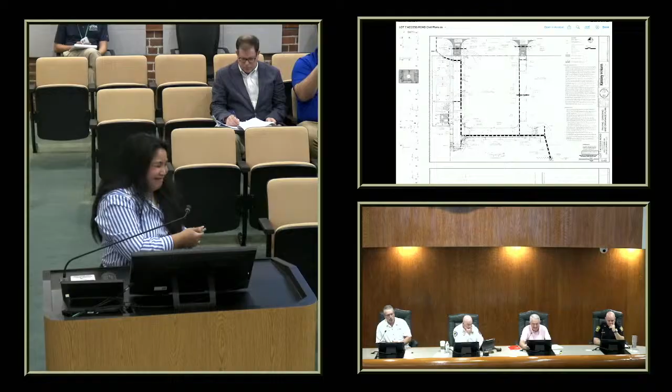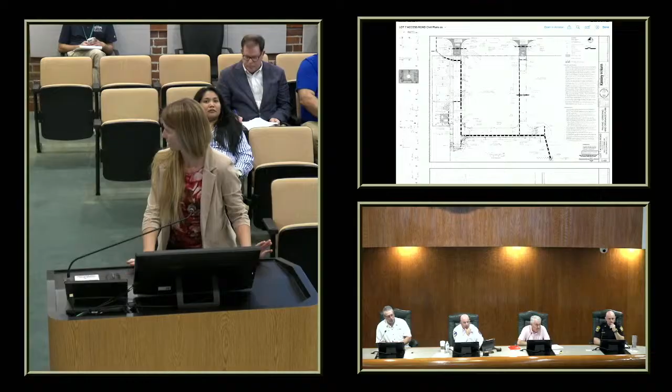All right, the applicant's in attendance, would like to discuss the comments you've received. Yeah, we had questions, but to not hold up the DRC, Dale and I are just going to talk about it after. Thank you. Right, they will meet offline.

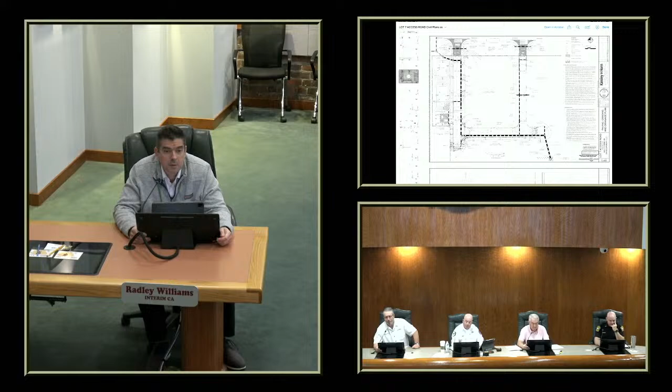Any other questions or comments on this one? All right, planning has nothing else. Police, no comment. Public Works, no comments. Fire, no comments, thank you. Building, I don't have anything.

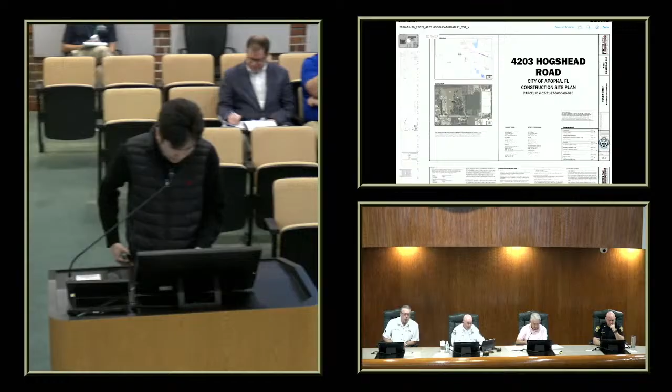Next item on the agenda is 4203 Hogshead Construction Site Plan second submittal. It says Gene's project manager, but I believe it's June's project. Good morning, this is the second submittal CSP for industrial development at 4203 Hogshead Road. Future land use is industrial, zoning is light industrial, and the total building area is about 4,000 square feet of office and 30,000 square feet of open storage structure, with outdoor storage of about 2 acres.

The applicant is available for any questions. All right, the applicant's in attendance. Do you have any items you'd like to discuss with the DRC? There were only a handful of comments, I think Dale had 3 or 4 of them, so I'll just have an offline discussion with Dale. Dale's the man today. All right, any further questions on this one?

All right, planning has nothing else. Police, I've got no comment. Public Works, no comments. Fire, no comments. Building, I don't have anything.

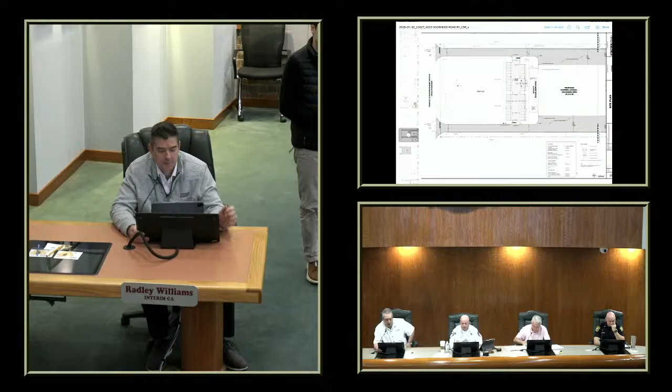Thank you. Next item, Apopka Phase 4 Soccer Fields Northwest Complex Construction Site Plan first submittal. I am the project manager on this one. This is a plan for soccer fields at the Northwest Recreation Complex off Jason Dwelley Parkway. It's a city project, representative for the city is here to discuss the project.

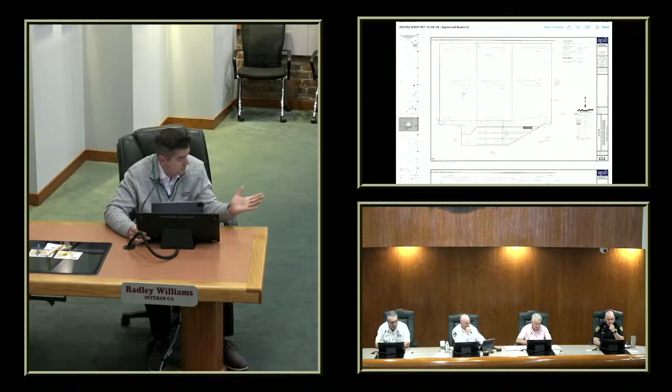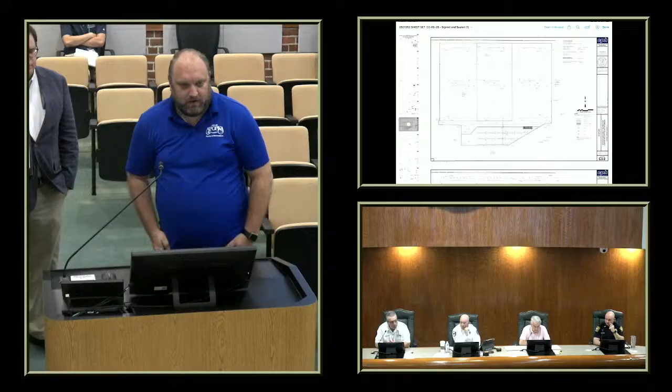If you guys wouldn't mind coming up. Chris Richter here with the Parks Department, also have John Stockham here with CPH who did the design. If there's any questions, I know we received comments back from Dale and Bobby, so we will address those and provide clarification as needed. But if there's any additional questions, feel free to let us know.

Does any member have any questions for the applicant on this one? All right, and as they mentioned, they received comments from Planning and Public Works, and we'll look for that and have a resubmittal on that. Planning has nothing additional other than the comments that were generated.

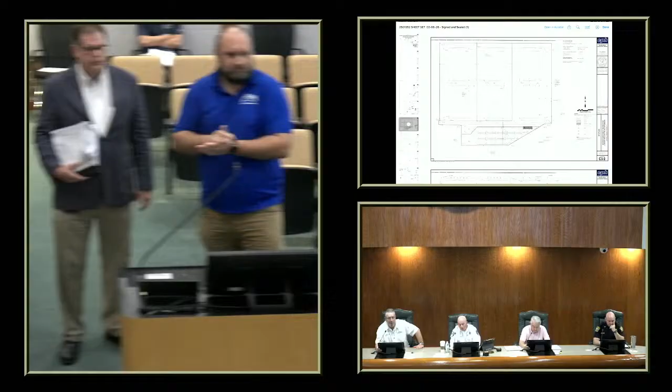Police, I don't have any comments. Public Works, no additional comments. Fire, no comments, thank you. And Building, nothing. All right, thank you, gentlemen. Thank you.

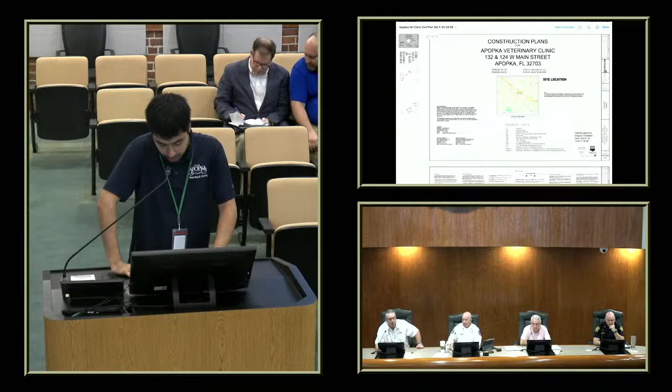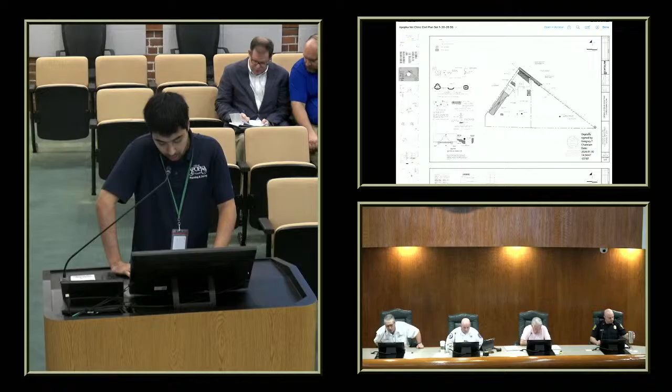Next item, Apopka Veterinary Clinic Construction Site Plan first submittal. Amir Hamza, Project Manager. Good morning everyone, so this is an expansion of the existing veterinary clinic. It's a new 3,662 square foot building. The zoning for the property is mixed use downtown, and future land use is commercial. Staff and applicant are available for comments and questions.

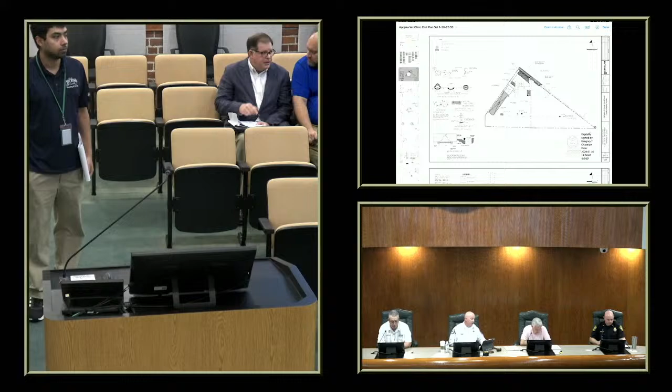All right, I believe the applicant's in attendance. Do you have any questions or comments for the DRC? Yeah, my name is Greg Chatelaine, I'm with Chatelaine Engineering. My name is Bennett Sebastian, I'm with Envision Development. We're applicant on behalf of the owner.

And I think most of my questions are in regards to the planner or the engineer for technical, I don't know if those guys are here. Yeah, the planner is right here, and then the Public Works is right there. Okay, so should we ask our questions line by line right now, or do we save that for later?

However you want to do it, or if you want to schedule a meeting offline, we can do that also. What are your thoughts, Ben? What do you want to handle?

Well, I think there's quite a few comments we have to address, so we don't want to take up everyone's time here going through that. Is there any overarching feedback that we need to be aware of at this point? Just the comments. Okay, yeah.

So then we probably need to schedule an offline meeting. We've had a couple of meetings already with planning and zoning, so we can schedule another one to review these comments. And we've had several phone calls working through this.

Okay, and so as far as planning, who would be the main contact? I guess we have the contacts, we'll just stick with the main channels here. Planning at apopka.net to set that meeting up, or you can set it up directly with me at dsmith@apopka.net.

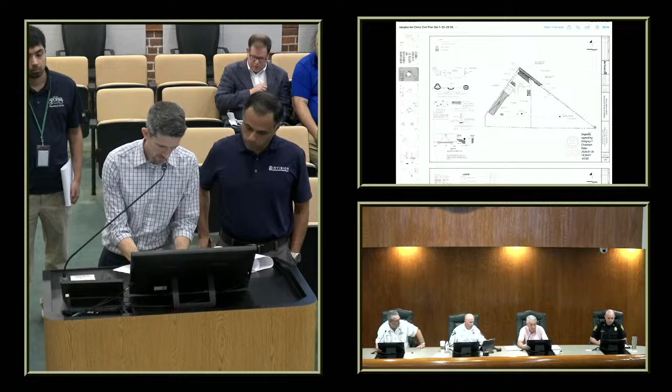Gotcha, so you're the main point of contact we need to talk to. I thought you were in engineering. Well, I'm public works and engineering. Engineering and public works. The planner is behind you.

Got you, and so, Amir Hamza. Okay, nice to meet you, Amir. Nice to meet you. Amir Hamza. Okay, do we have your email address? Yeah, it's AHAMZA at apopka.net. Okay, because I think you put the comments together.

Yes, I mean, we can discuss the comments here if you want, unless you'd prefer not to in front of the group. Yeah, I mean, that's what every other development does, so let's just do it if you prefer. I mean, up to you guys. We're here, might as well get it done.

All right, so these comments are going to be addressed to you? Yes, planning and zoning comments come to me, and public services comments go to Dale. Okay, I don't know if you want me to take the lead or you. Okay, and then you can just chime in if you need to, just tap me on the shoulder or whatever.

All right, so the first one we had in planning and zoning, number 4, said it needed a traffic impact analysis. Is that just a trip generation to show how many trips per day, or are you needing an actual traffic analysis report? Yeah, like a traffic report. Okay, yeah, okay.

Because even FDOT wasn't even requiring that. It's something we require in the CSP for the city. Okay, and then we talk about MUD, zoning is MUD, commercial.

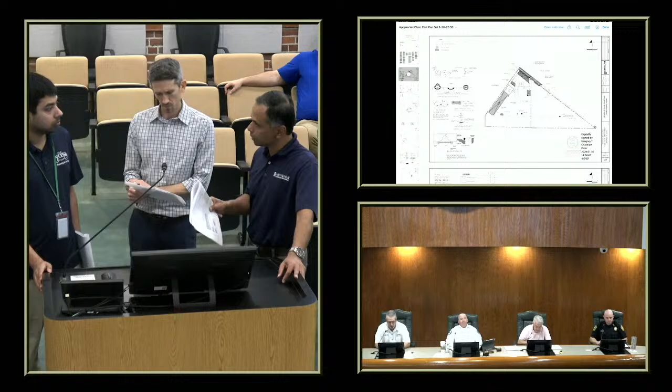Okay, we'll skip that. Do you want to speak to the architectural elevations comment? Yeah, it's asking for 4 elevations of the building, but when I went to the application site, it asked for color images. Yeah, we need color renderings of all 4 sides of the architectural elevations.

When did you guys start doing that? Because we've always just provided black and white elevations on the architectural drawings. I mean, it clearly states colored elevations. I know, but that's unusual, isn't it? Not really. Okay, it's not something we normally provide, but we'll work on that.

So we talk about these, it talks about setbacks and the 0 build-to line. In the pre-application meeting, I don't know if y'all remember, but we said this is an existing building, right? That's the existing building, but you're building an entirely new building there.

Well, no, this is an existing building that's also an existing building. We're doing an addition to it. So when I looked at the site plan, it didn't look that way. Understood.

It looked that way because if you go on the sheet - can I scroll? Oh wait, that's just a little bit of lag, I think it's doing it. Yeah, so if you see, it looks like, because of the way you hatched it, it looked like an entirely new building.

I got you, so because it's existing, it's grandfathered in, as long as it doesn't go over 50% of the value. What's that? If the value of the building itself doesn't go over 50% of the existing, then you can keep your grandfathered status. I think it's gonna probably go over.

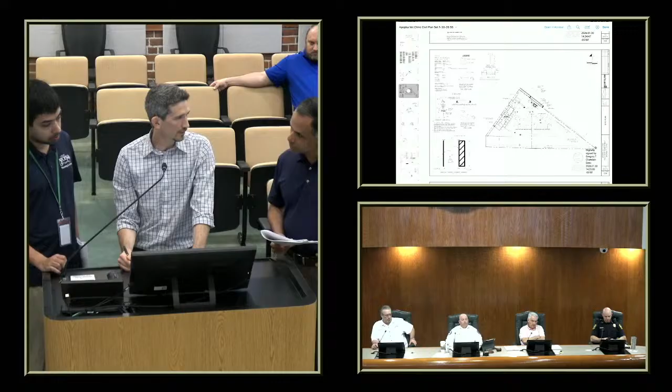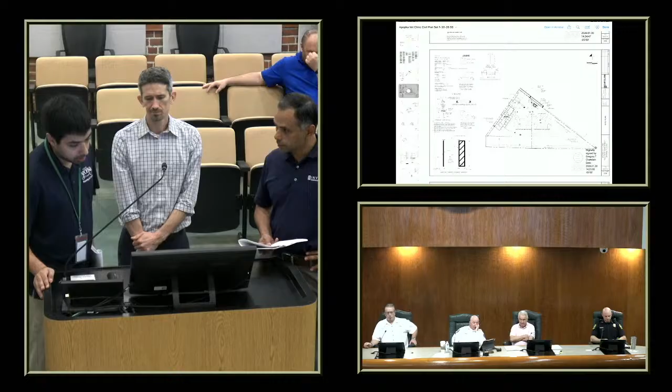Yeah, I mean, we've had this meeting already a couple of times with planning and zoning, and it was determined that we did not need to comply with that because it's an existing building. Yeah, I do remember that meeting, and if it's an existing building, like I said, you shouldn't have to. But what he's asking for is our code has a non-conforming section, and you need to demonstrate that you are in compliance with that.

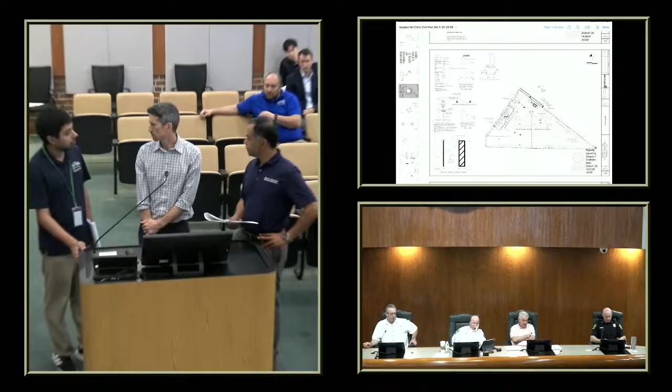You need to prove it - the burden of proof is always on the applicant to show you meet the codes. So you need to demonstrate that you're not exceeding 50% of the value of the structure. If you are, then you have to meet current codes. What's the code reference on that? It's in Chapter 8. Chapter 8? Okay, the code's available online for you to look at.

Do you have any other comments or questions on that, Ben? We've had a couple of meetings. We had this meeting before we did all the building design, and we were told we were okay, so that's why we progressed with the building design the way it is. That was a 3-month process.

Yeah, because that's my concern, the 50% value. If you look at the existing building...

Yeah, because y'all didn't share that in the pre-application meeting. What sheet do you need? Oh, just looking at CO3 and CO4. Okay.

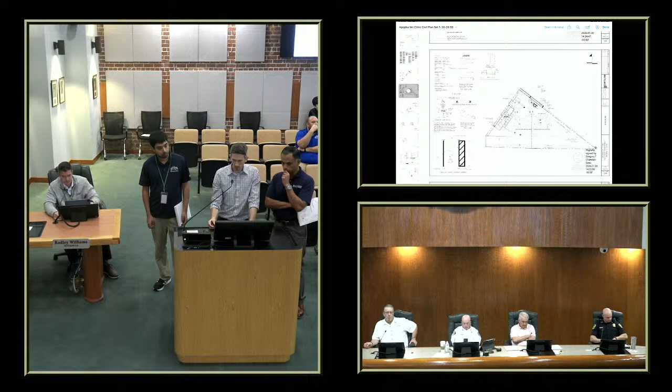Because if you look at our existing building right there, it's a little small building. That little building's going to remain, but it's going to be expanded. You can tell just by looking at it, and then the expansion. Go down to the next sheet please. The new building is 3 times as big as the existing.

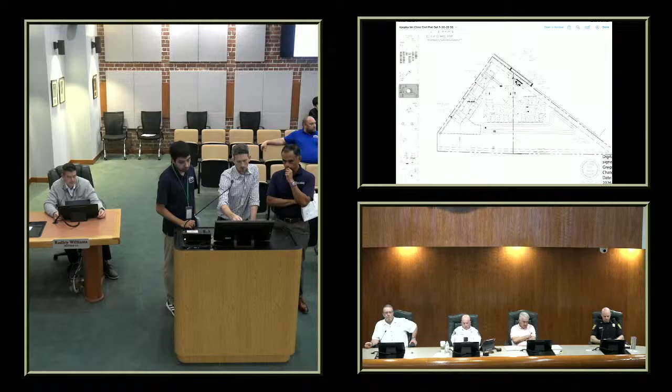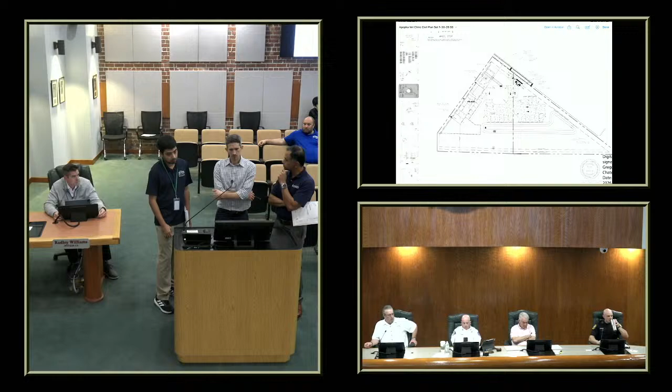So I recall from the meeting that you guys were going to keep the existing building and then build a new building - you weren't going to add on to the existing building. That was what I remember from our pre-app meetings. Yeah, I remember that too. This was always the plan from the start. Always the plan - we're going to keep this building right here in the middle, and then that little building. If you go back one sheet to the demo sheet, we're going to keep that little existing building and add on to it. That was always the plan.

Well, I think what you need to do is show what the value of the new building is and what the value of the existing building is, and then we'll take a look at it from there.

Okay, and if it's over that 50%, will y'all still consider working with us? We'll have to look and see what the code says, but provide that. Okay, and then during the resubmittal we'll work with it. Gotcha, so we'll have to look into the value of the existing and then the proposed building, and then try to make our case.

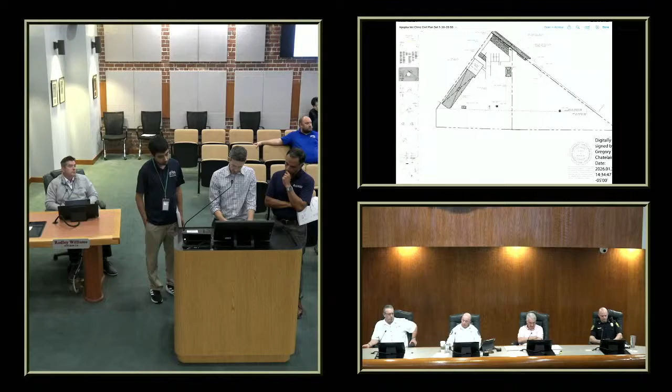Correct - setback. You said something about a setback needing to be corrected, number 9. If you can pull up the site plan please, the next sheet. Which setback? The setback's over... We show setbacks here, then we also show them in this. No, it's not the site, it's just the site data table. Oh, the site data needs to be updated to match - maybe there was an error. Yeah, okay, just that simple.

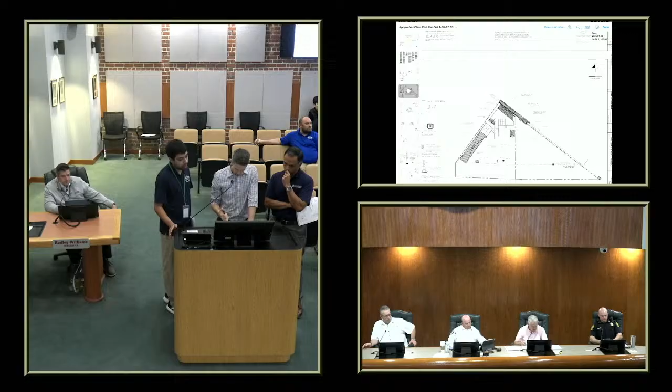It's not the building itself. The building itself previously was like to the front, but because it's... gotcha.

And then you asked for a parking plan, but the site plan shows the parking. No, do you see there's parking information - you're required to mention on that part that it's a parking plan, as our code requires it. You have to change the name to parking plan. Oh really, okay, so change the site plan to parking plan in the title line? No, not the site, just the parking section here. You would have to create a new sheet basically, instead of putting it all in one page - put in a new sheet with probably the same site, but then you'd have to mention that as a parking plan. Okay, no problem.

Ensure the ADA spaces are van accessible. That shouldn't be a problem, right? We just have it's a normal 12 by... Yeah, no, you just have to mention that it's van accessible. Okay, that's not a problem.

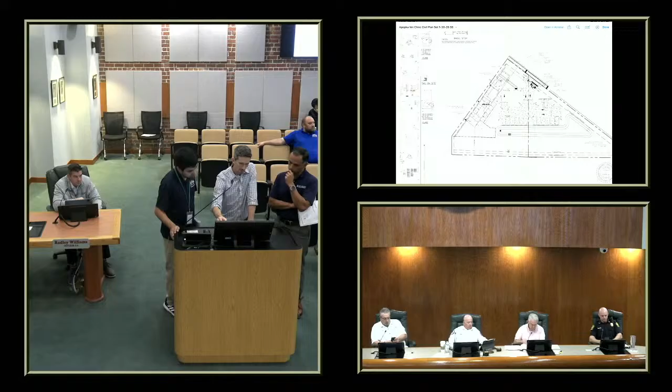We're gonna have an island here, island here, island here. When I look at this, it doesn't look like islands. Yes sir, that's an island, that's an island there. No, I mean like a detail - it just looks like there's no detail to it, so you couldn't tell that it's an island. Gotcha.

But is that acceptable for what you see? Landscaping's gonna go there at the end of every parking row. You're gonna have to show that it's an actual island. How do you want to show that, by a note or just the landscape plan? By basically showing a border, so it's clear it's a traffic island, not just grass you'd drive into. There's nothing bordering the asphalt from the grass. You mean like a curb? Yeah, we need to see a curb for the island.

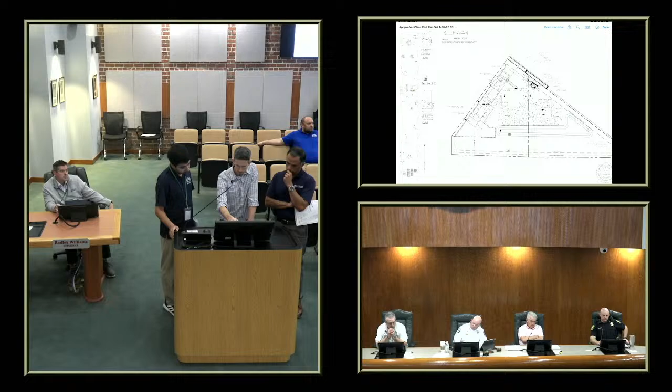So you said an off-street loading berth, like a loading bay. Does that have to be like a parking space? Could you just take a parking space and call it that? No, the truck is gonna have to maneuver in the space where the loading is gonna be. You can't just use a car parking space as a loading space. Loading for what, like a truck loading things out of the truck and into the building?

So the question is, are you guys going to have semi trucks delivering things? No, it's a veterinary clinic, how does that work? Okay, so if you aren't going to have that, then you need to state in your response letter that you're not going to have that - none provided.

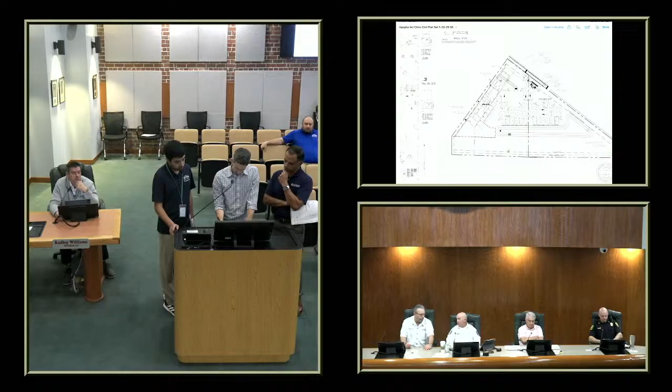Add a note. Okay, I think the rest on that page was pretty self-explanatory.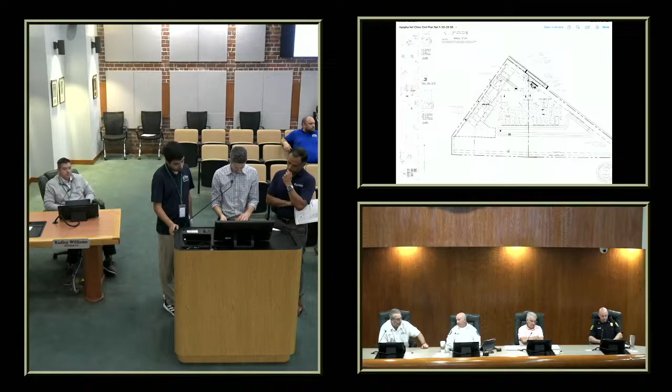Is anybody here from fire? Okay, how you doing? Good morning. Good, how you doing? Good. So I just wanted to touch on these comments.

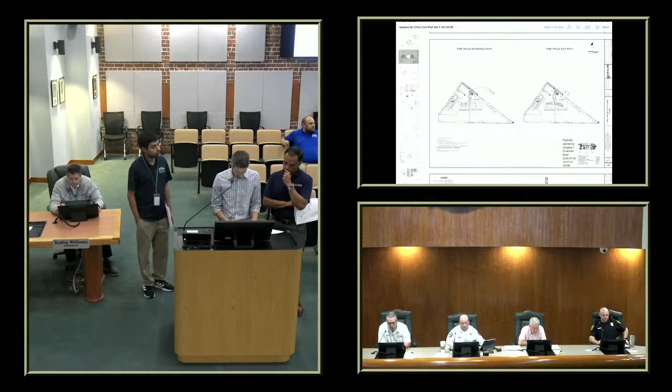If we can, do you mind going to C07, sir? Yes, so there's C06, and then C07. So you asked about the hydrant. If you zoom in a little bit, we are providing a fire hydrant - you can see it over there.

We need to put a call out on there, but do you see the new proposed hydrant right there, to the right? I just spoke with Dale on it, Dale showed me where it's at. Okay, it wasn't labeled. And the fact that it's not labeled is why I didn't see it. Labeling it would go a long ways in the future. Yes, sir, we'll add it on there.

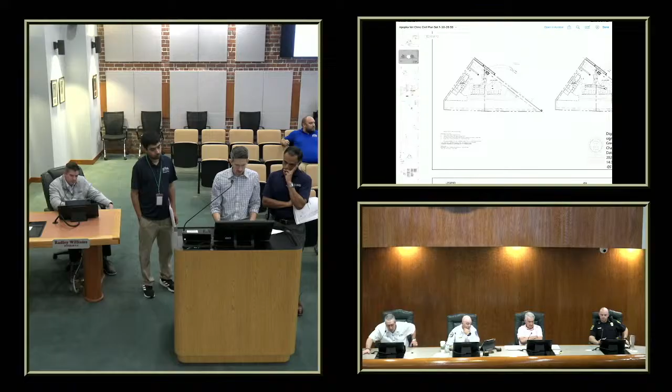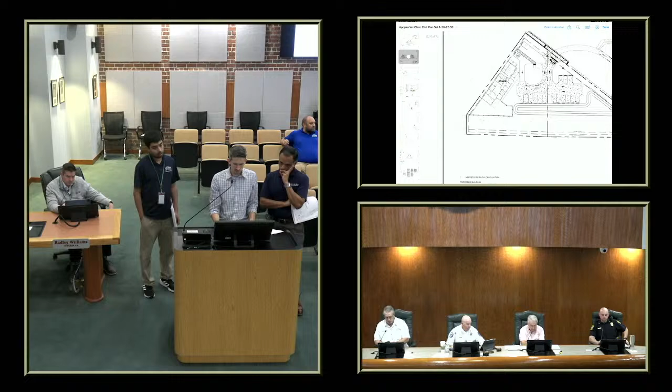Alright, and then there's that square footage of the new building - if you zoom out, go back one sheet. In the bottom of the sheet we have the needed fire flow calc, if you scroll down. So we based the fire flow calcs off the largest building on the site, which that's my understanding of NFPA, based off the largest building on the site for needed fire flow. Mhm, so that's what we based it off of. Are you in agreement with that?

So what's your largest square footage building, 36, I guess is what you're telling me. What is the existing 2-story building along with the new portion being attached? What's going to be your total square footage for those combined? Got you, that's the 3,662. So that is those two combined. That's correct, yeah, we also show that on the site plan too. Okay cool, alright, that's what I wanted to see.

The other issue I have is your auto turn - you guys used a 33-foot fire truck, I think, and I commented on there that you guys need to use a 47.65-foot fire truck. Yes sir. So you're going to need to go back and get that redone for me.

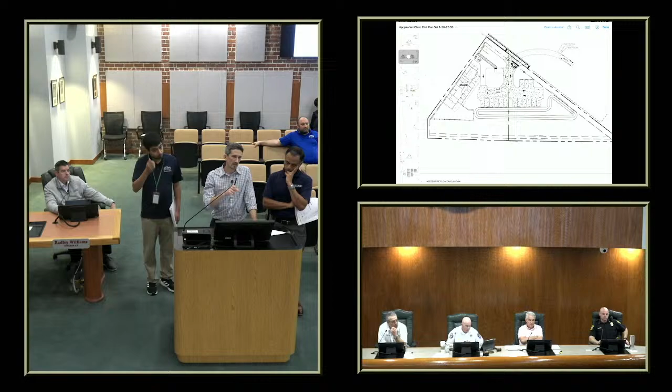Gotcha, now just for the record, I did look at my emails this morning, like where did I get that information from for this fire truck. So originally you had sent me the specs on the smaller fire truck. I sent you the specs of multiple. Oh multiple, yeah, and in that page we use a tower truck. So you used our pumper, which is a 33-foot fire truck, which is what we do have, but we go by our largest truck, which is our tower truck. So in that contractor reference guide that I sent you, you had both in there. Gotcha, I'll look in it again, see if I can figure it out, if not I'll just shoot you an email. That's fine, no problem, thank you sir.

Alright, now we're getting into the fun stuff, the transportation and engineering. So it says need stormwater calculations - did you not?

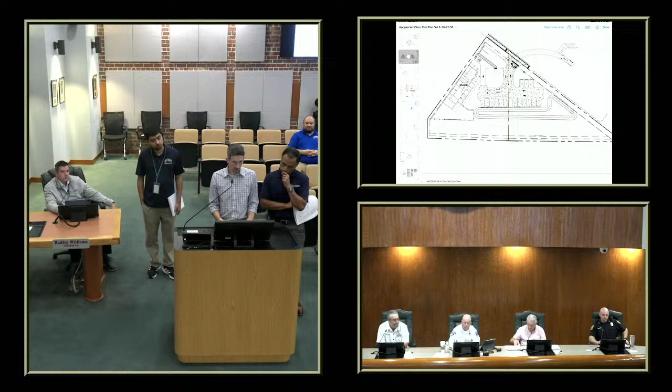There wasn't a place in the application for stormwater calculations to be uploaded, so I uploaded that separately.

There should have been a section on there to upload stormwater reports, since every application has them. It should be under attachments. I added everything that was available, but is there an extra attachment option? No, it should be in the required attachments, just upload it into the portal. That's all you have to do.

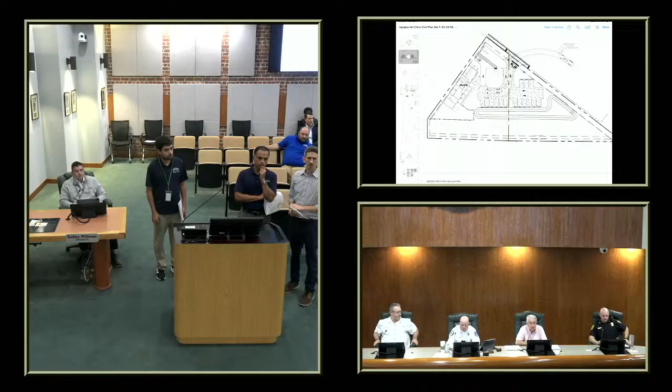In the required attachments, unfortunately it lists stormwater and geotech, and about half the time people upload the geotech and forget the stormwater. Maybe that's what happened here. Okay, we'll make sure to get that uploaded and get it to you.

I saw that you were asking for a 12-inch turn down on the edge of the concrete parking adjacent to the pond. What is that in reference to? Well, your sheet flow off the parking lot into the pond will cause erosion if you've just got the edge of the slab. Your owner's not going to like that two or three years from now. Gotcha, so you want to see a curb with a flume?

You don't have to do a curb if you just put a turn down like you would on ditch paving, so the water that runs off doesn't eat out from under the ditch paving. Okay, I may follow up with you to get some clarification on that.

Underdrain detail, it says the underdrain detail does not work with the pond liner detail. You need to look at your three details on the under drain and check the dimensions. The dimensions don't work, so you need to clean those three details up. Okay, maybe I can follow up with you to get some clarification on that.

And then you asked about the dimension between the skimmer and the outlet box. Yeah, I want to know how far the skimmer is standing off of the outlet box.

There was a young man who did a presentation years ago. He took 100 developments and measured the skimmer dimensions and the outlets that the engineers modeled. You know what was the controlling factor? The skimmer, because most people had their skimmers too close to the box.

They didn't allow the water into the box. So this is why there's not a set dimension there. I don't know if it's 3 inches or 3 feet.

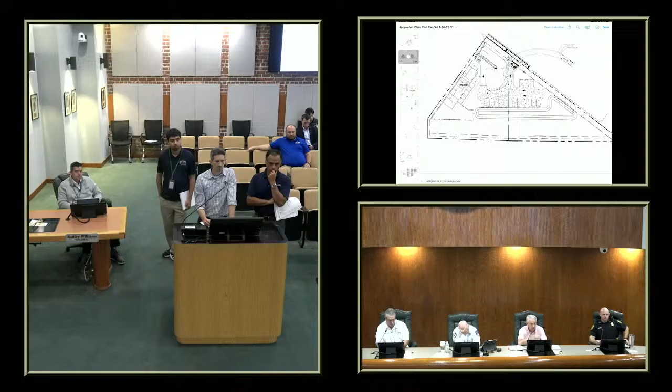That's a 2-inch service line you're coming off of, and you're coming off with a 1-inch line, then tying it into the existing building, and then stepping up to your new building with a 1.5-inch line. That doesn't make sense - you go from a 2 to a 1 to a 1.5. If you don't mind, can we pull up that utility plan real quick?

I don't know off the top of my head, we'll have to scroll through. Probably the sheet after this one, C07. Yep, there it is. If you don't mind, can we zoom in? And go up a little bit, please.

All right, so we have an existing 2-inch water meter, which we're going to bypass. May have to do a new meter. So we have a 2-inch line coming in, put a new meter with a backflow preventer, go into the expanded building, and then we have our existing building, the existing smaller building in the central area, more to the east.

That's the 1.25. Right, it's a 1.25. Or no, it's a 1 inch. That's the 1 inch. We can look at this later, but if you look, you've got a 2 by 2 by 1 T, which tells me you've got a 1-inch line going to your meter, and then coming out of it you're tying into the existing building, and then you're going to your new building with a 1.5-inch. So you just need to clean that up to make sure you're getting the water to the building that you think you're getting. Gotcha.

Yeah, the 1 inch is just for the existing building. So we have the 1 inch, and the 1.25 is going to the proposed building. Right, and then the 1 inch is going to the existing. But you're coming off the 2-inch line with a 1-inch line, and I think you need to look at that. That's a 1-inch line, you're at the very end of the service. Just make sure you're giving your client the water they need for the clinic. Okay, all right, so we'll look into all that and double check, make sure everything is correct.

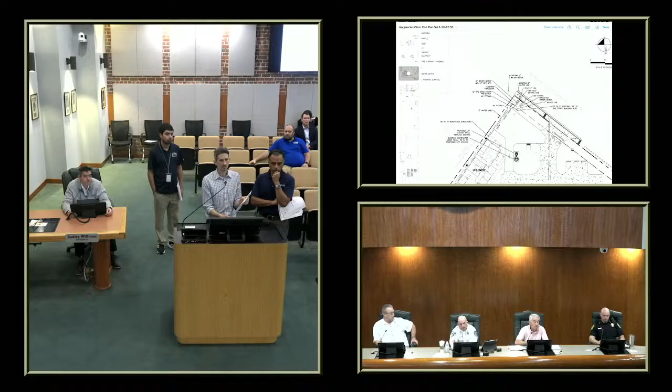The problem is you normally get a combined letter if I get my work done on time. Yeah, I typically don't get my work done on time. That's why I post it after they close it out, and I always send an email out. Okay, but we got everything. That's everything in there. You've got comments from the first submittal. Yep, and I looked at all of that, and these are comments based on your second submittal. Okay, sounds like we're good.

Two more questions for you. I apologize. Yes, sir. Something that hit me with the size of the building, being over 50%, you do realize it's a two-story structure you're connecting to. That would trigger the two-story structure and the entire building to be sprinkled due to the fact that it's a two-story structure. That's city ordinance. So that's something we need to look into and consider.

And also, overnight stay for animals, are you guys considering that? No. Okay, so anything with overnight stay for animals will trigger fire alarm, so just as a heads up. Yeah, gotcha. So the city ordinance for sprinkling, do you know where that's at? It's in our code, Municode.

Okay, you can pull up our city Municode, shouldn't have a problem finding it. It talks about any applicable building 7,500 square feet or more gross area, or 2 stories or more in height, requiring fire sprinkler protection for commercial structures. And if you're attaching another building that's over 50%.

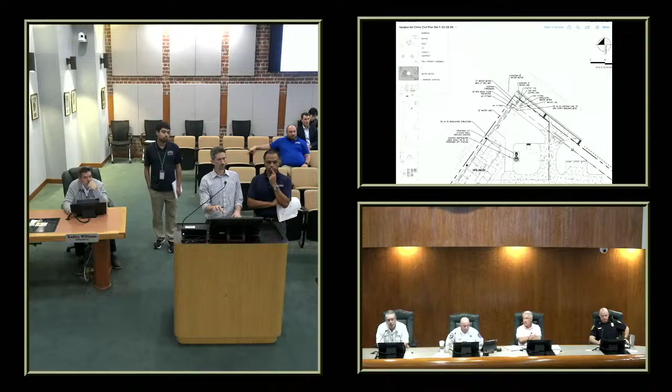So is it just the bigger building, or both buildings? Once you attach the building, it becomes one, so you're going to have to sprinkle the entire thing. But what about the other one in the middle? If it's not connected, don't worry about that one. If it's under 7,500 square feet and all single story, it does not need to be sprinkled.

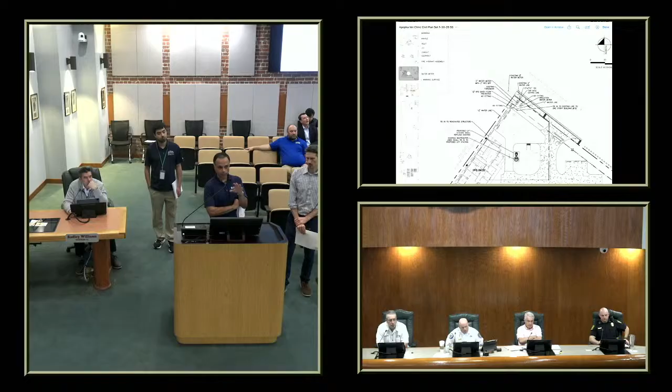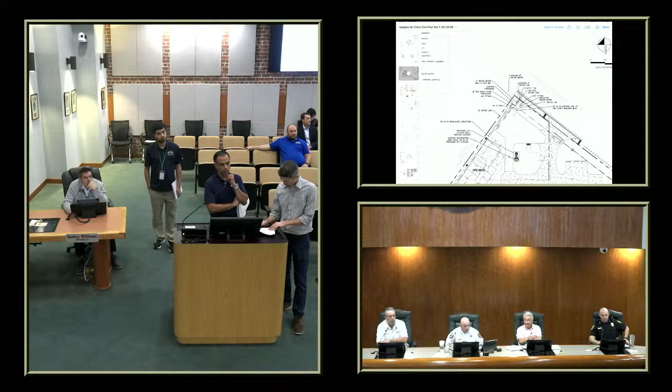Okay, so if we're having to redesign the building, we might just eliminate this two-story building altogether. Whatever works. I just wanted you to be aware of our municode for sprinklers, so you weren't caught by surprise on that. Okay, thank you, sir.

Thank you. Any other questions? No, that's all I have. Thank you very much.

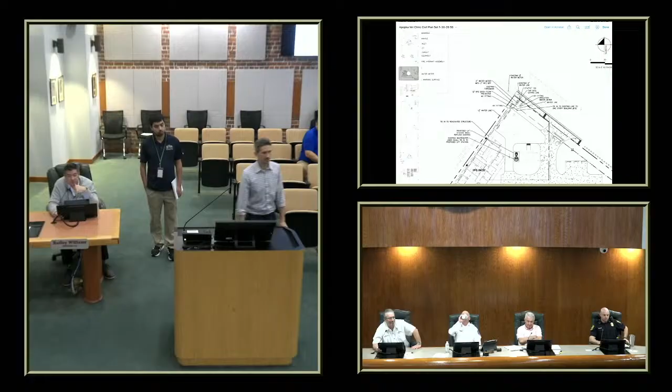Does anybody from your team, DRC, have anything else to add? Planning has nothing else other than comments that were generated. Police, I've got nothing. Public Works, no other comments. Fire, no comments, thank you. Building, I don't have anything.

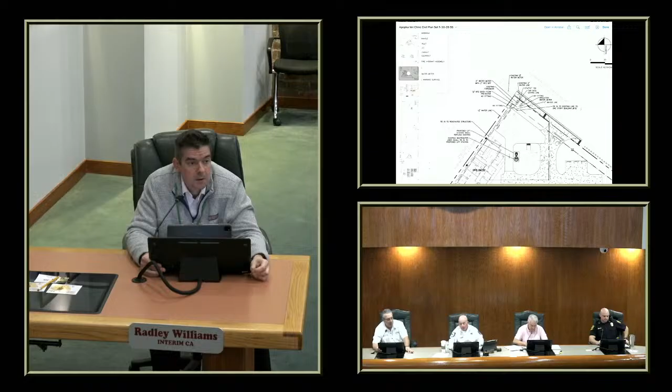Next item is Sheeler Park Major Development Plan, third submittal. June is the project manager. This is the third submittal of major development plan of a single-family housing subdivision located at 1920 Shore Avenue. The total size of the property is about 40 acres, and the development includes 115 single-family residential lots.

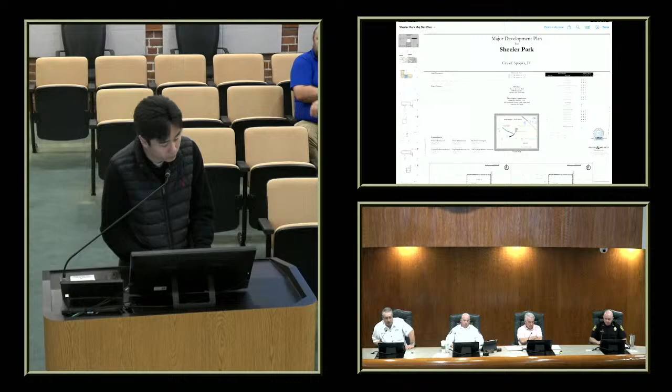Planning has no significant comments. Some comments have to be addressed before the CSP, and the applicant is available for any questions. I believe the applicant's here in attendance. Do you have any questions or comments for the DRC? None. Okay.

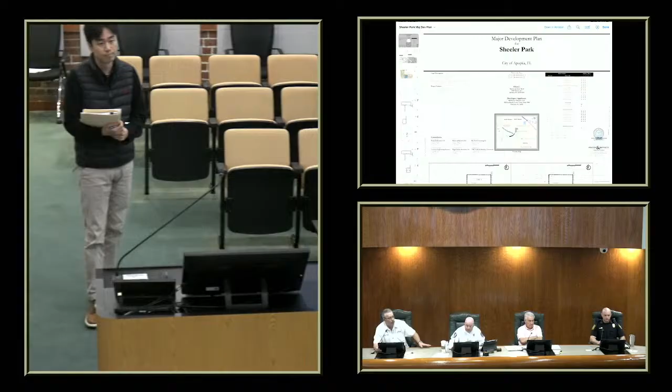Planning has nothing else. Police, I don't have anything. Public Works, don't have anything. Fire, no comments, thank you. Building, I don't have anything. Thank you, June.

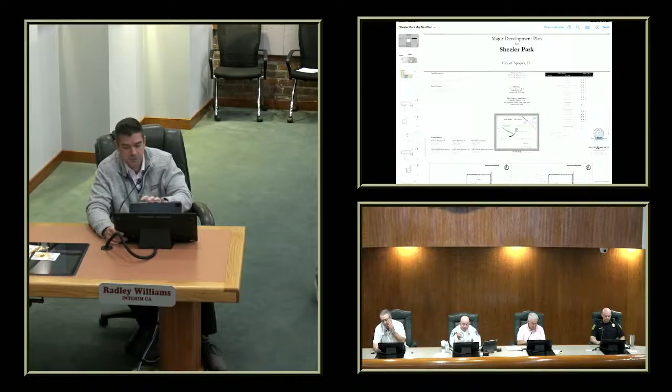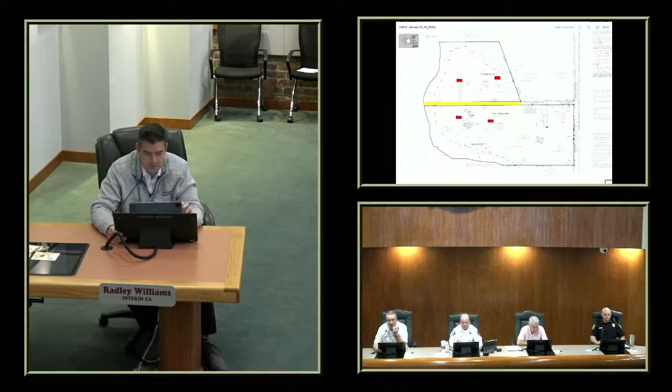The next item is a variance, or vacation, I'm sorry, of right-of-way easement, first submittal at 1112 Schopke Lester Road. I'm the project manager on this one. The applicant's representative is here. You received comments from the city. Is there anything you would like to discuss?

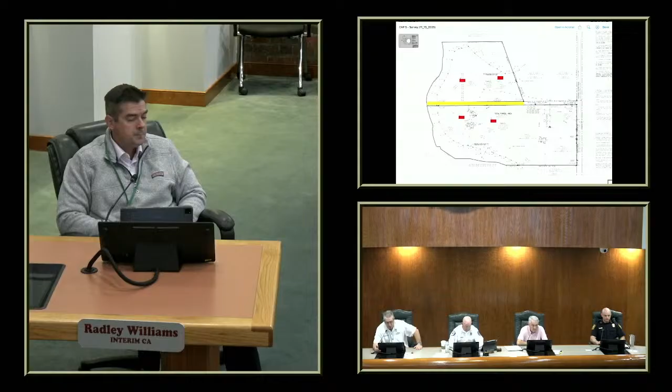Morning, DRC members. Jonathan Hewells, 215 North Eola Drive, Orlando 32801, here to answer any questions you might have. The only comments we received were from planning, and we're going to work on getting a quick response to those and hope to get on the next city council agenda. It's a petition to vacate a historic right-of-way from a plat from a very long time ago that's never been improved, and it really bifurcates the ownership of the property. The idea is to vacate it and unify the ownership of that entire property, which is under single ownership today.

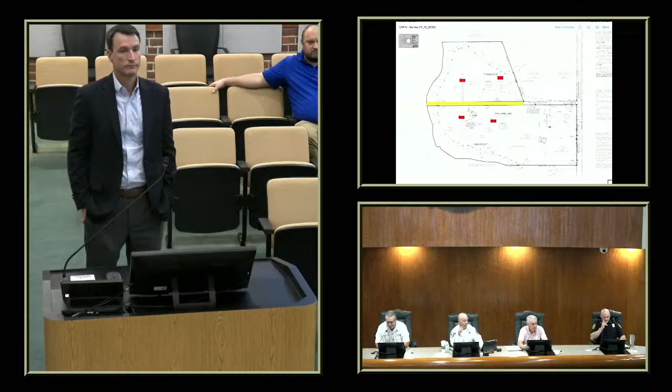Does anybody have any questions on this one? Planning has nothing other than comments that were generated. Police, I don't have anything. Public Works, actually I had a question. I thought you were vacating the entire right-of-way from Schopke, so you're not doing that first part. We're not doing that first part.

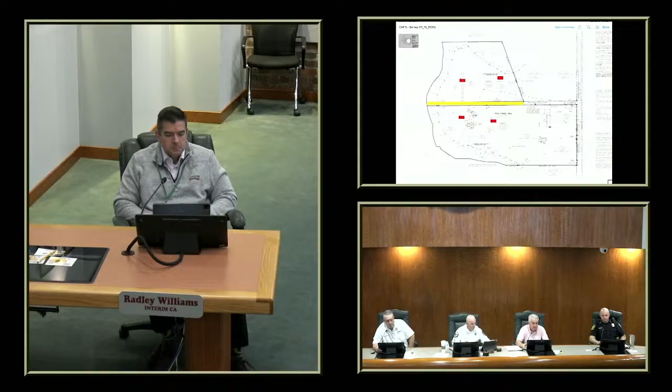It's just one landowner that owns all the tax parcels adjacent to this section of the petition to vacate. So the remainder from the yellow line towards Schopke will remain as public right-of-way. This is one I have not gone out and looked at—is there a dirt road in the park that's going to remain open to service the other section within the park? No. Okay, if it's never been open, then I don't have any objections.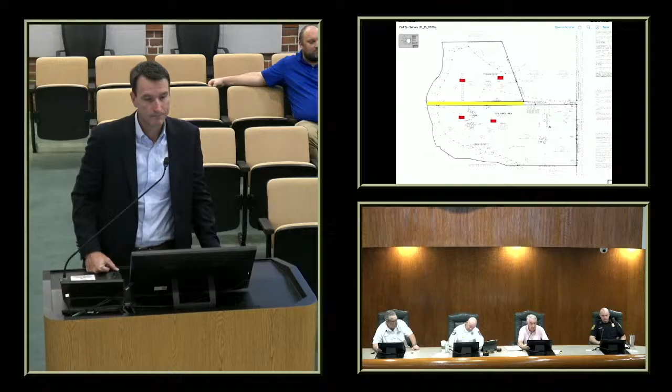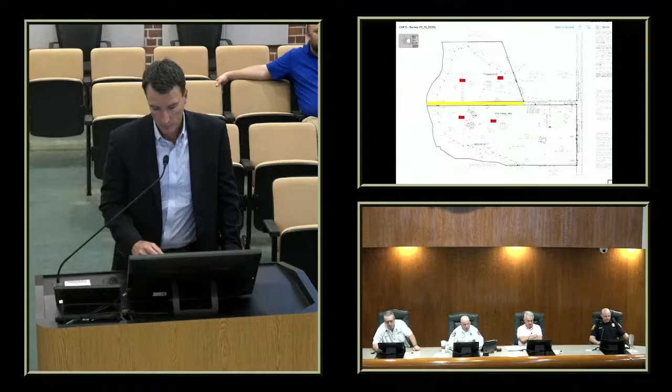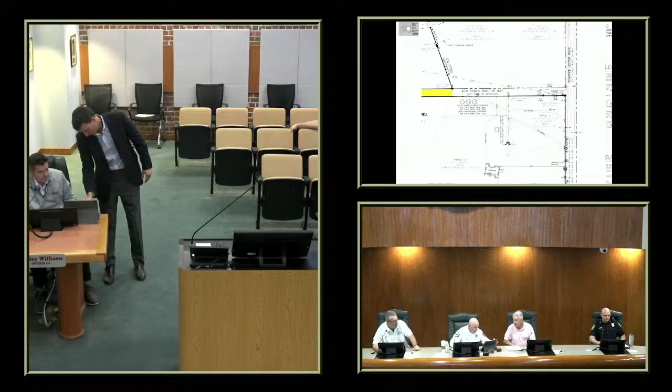Question then—how would this property be accessed if the right-of-way at the front is still there? How would they access it after the vacation? So there's an access point currently, across these properties, and the owners do have... like an easement? Yeah, okay.

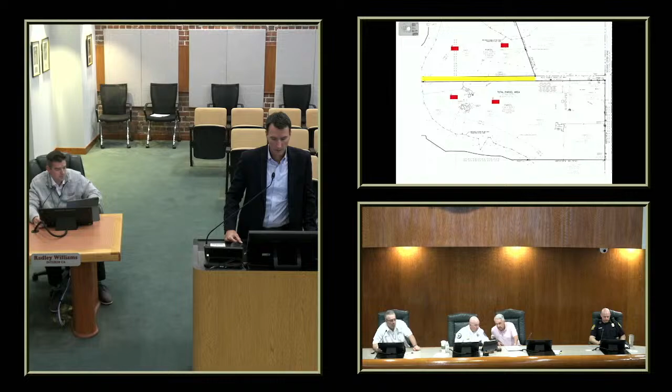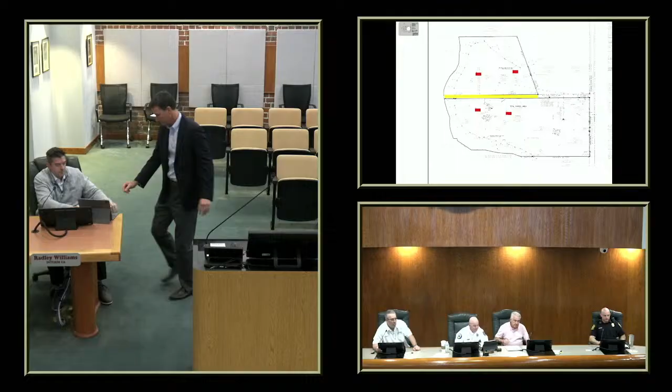Like I said, the right-of-way's never been improved in any portion of it. This access road does cross up here into the portion of the right-of-way, but it's not improved to any city standard—it's a dirt track.

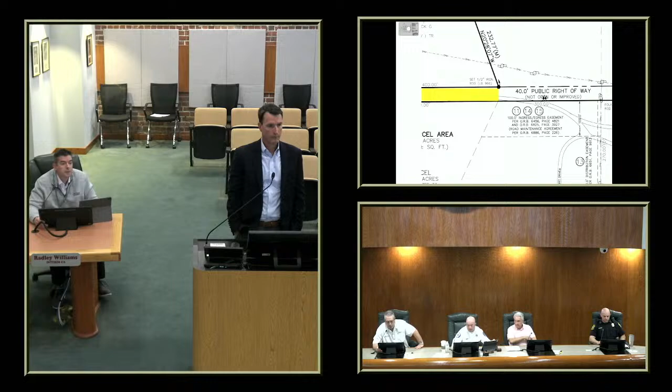All right, Dale, any further questions? No other questions. Okay. Fire, no comments, thank you. Building, nothing. Thanks. All right, we will look for the resubmittal and go from there.

Okay, any items for discussion? Hearing none, we're adjourned.